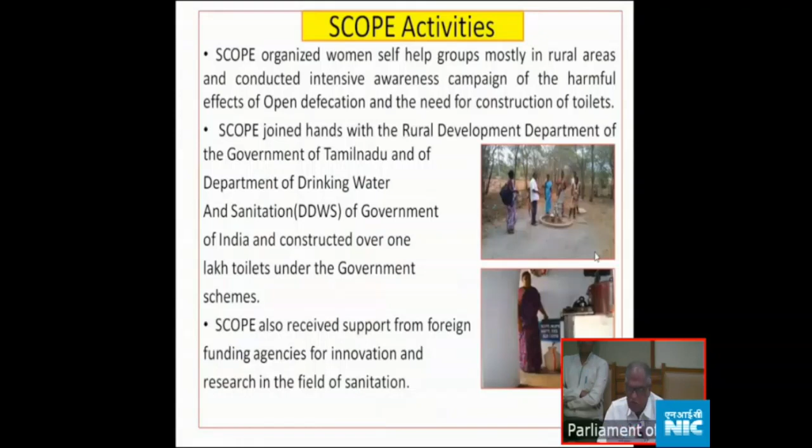Twin leach pit and septic tank toilet. And then many awareness programs I have conducted. Only then have I convinced the people to construct toilets and promote their usage.

I have also conducted training and created models to show in exhibitions. Different types of banners and pamphlets I have given to all the households and the people being trained.

These are all photographs of different awareness programs. I have shown what is happening in the field, because seeing is believing. Otherwise it is very difficult to convince the people.

Mainly we are constructing twin leach pit toilets, and people themselves construct septic tank toilets. Since the conventional leach pit and septic tank toilets and underground sewage system necessitate a huge quantity of precious water, they need more water because for one use we need at least 8 to 10 liters of water for flushing.

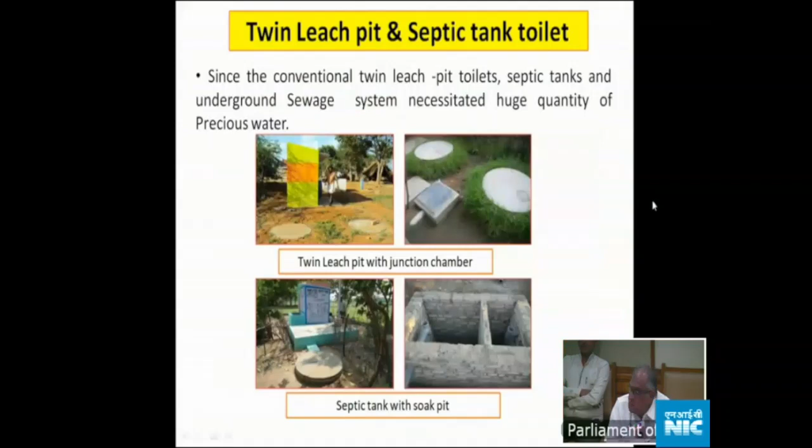What are the sanitation challenges? Even though the leach pit is a very good model, maintenance-free and everything, it functions well only under ideal conditions. We have to construct it strictly as per the norms, and we have to follow those norms.

In the first photograph, a hand pump is there and nearby a leach pit is there. If a leach pit is nearby, contamination will occur in the drinking water. In the next photo, the water level is like this - how can the leach pit work then? So in all places it is not good.

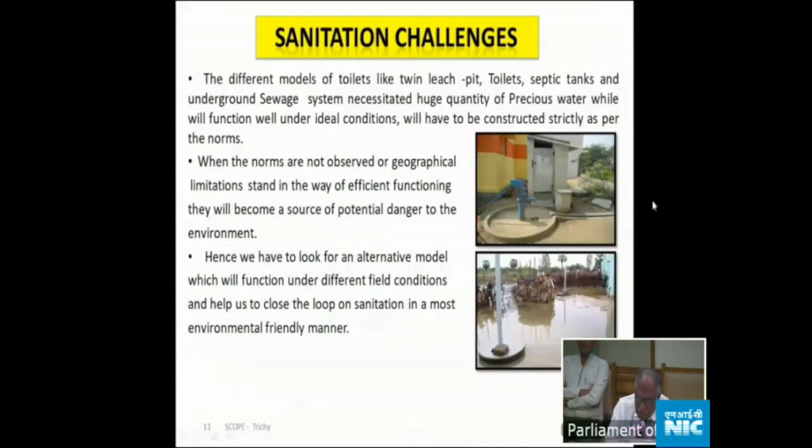Hence we have to look for an alternative model which will function under different field conditions and help us close the loop on sanitation in the most environmentally friendly manner. The answer for this is the ecological sanitation model, which is a solution to most of the problems we face in the field of sanitation.

What is EcoSan? Ecological sanitation is a very good model. Sanitation needs an integrated, sustainable ecosystem approach. It involves several cycles to ensure public health - pathogen, water, nutrient and energy cycles. Human excreta and wastewater are not waste; they are resources which could be reused for improving agricultural production and preventing contamination of the environment. The EcoSan approach aims at sanitizing the products and not transferring problems from one cycle to another.

It is closing the loop. People use their urine and feces, which become manure, natural manure, then it is used in the soil, then crops grow, then food, then we can eat.

The closing the loop is there. Next, this is the toilet model. This is constructed above the ground level.

There are two chambers. The yellow pipe is for urine and the blue pipe is a body wastewater pipe. Above that is only the toilet, so contamination will not be there. It is not necessary to use more water or flush the toilet.

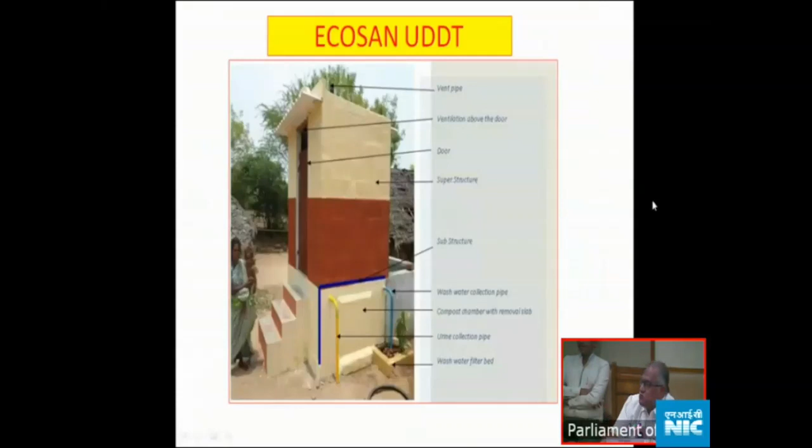See the two chambers, this is the inner view of the toilet pan. Center is the fecal matter hole, the front is urine, and back is wastewater from body washing. Everything is separated, and when one chamber fills up, they can use the other chamber.

We have designed it for one year. After 10 months, we can take it out by hand. It is not necessary to have any special people or any vehicle. This can be used for agriculture purposes.

Even Santha Sheela Nair, IAS, who was a secretary here in Delhi and Tamil Nadu, is taking that fecal matter compost in her hands.

No smell and no flies. Many households I have taken - more than 3,500 households I have opened and used for agriculture purposes.

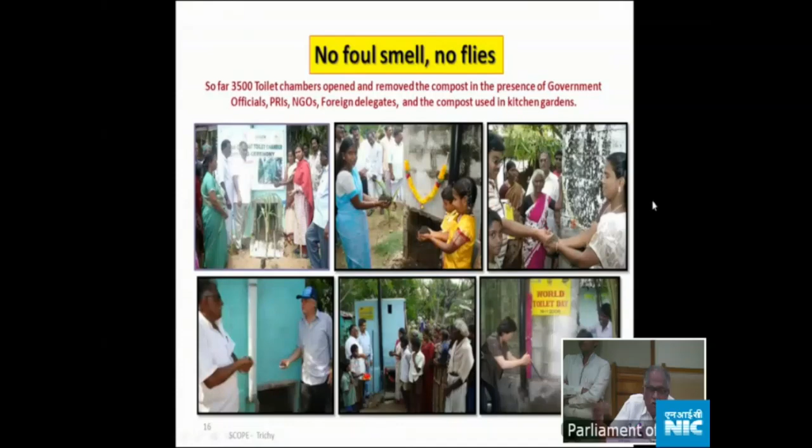Then the first community toilet. After constructing 250 individual toilets, with this experience I have constructed the first EcoSan community toilet in the country, in Musiri. That is a two toilet complex - one for men and another for women, and another one for elderly and handicapped persons.

See, the toilet was constructed in 2005. There are 7 toilets for men and 7 toilets for women, 14 chambers. One toilet has 2 chambers, so there are 14 chambers in each block.

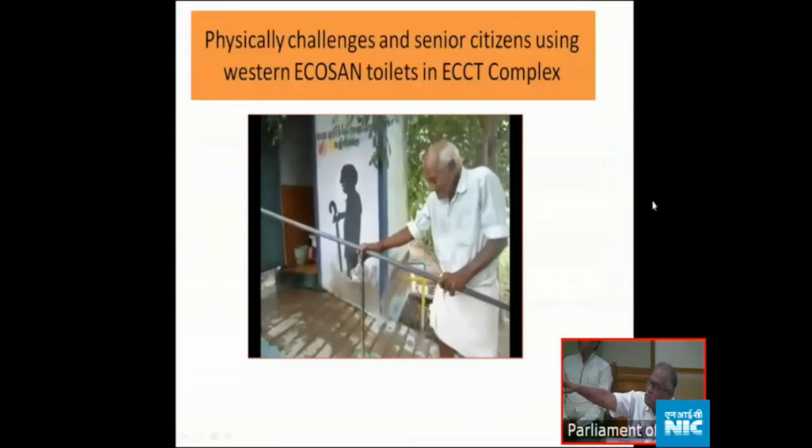Next slide - physically challenged and senior citizens using the Western EcoSan pan. I went to Philippines, they gave me a pan, a Western pan. I have put it in the community toilet. It is very easy for them to use the toilet.

For elderly people it is very difficult to sit and defecate. That's why in the Philippines they have already made the Western Eco Pan.

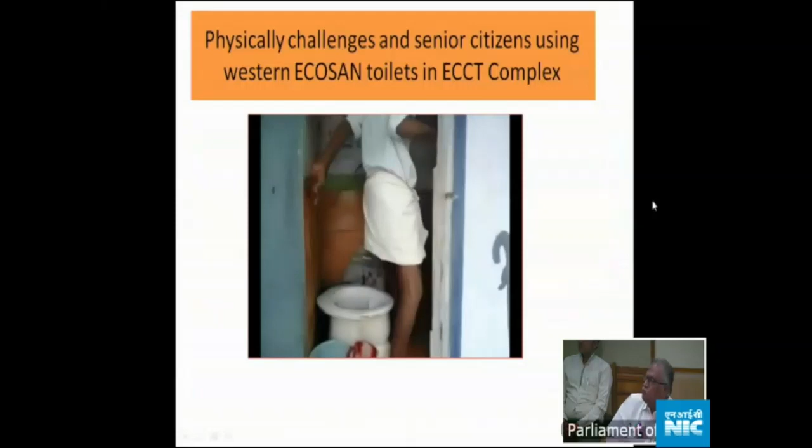Nothing is wasted. Urine is also used for agriculture, and fecal matter compost is also used for agriculture.

Those who are using the toilet can get money from it, because human waste is a valuable resource. In other community toilets, we go there and pay 2 rupees, 3 rupees, 5 rupees and get a token to use the toilet. But here, they use the toilet and take a small note, a small token we have given for them. The children have that.

We have marked it so each use they can get 10 paisa. In one month, one person can get 6 rupees. Like that, I have given money to the users.

Only then is this type of toilet promoted, because it is very difficult to change the mindset of the people. That's why I have given the money. Then people accepted it, and many toilets we have constructed.

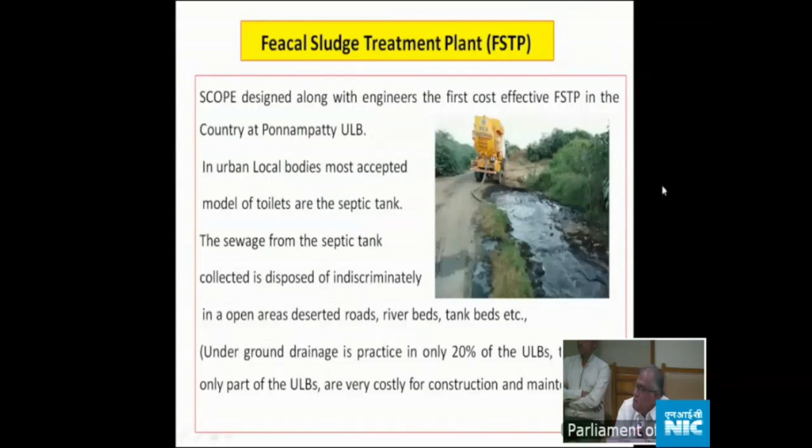The FSTP costs only 15 lakhs. I conducted this 4 years before in one town panchayat near Trichy, Ponnampatty. The treated water from the FSTP is used for raising vegetable gardens, trees, and even fish ponds, which enriches the water table area. Ponnampatty town panchayat was awarded the best town panchayat of Tamil Nadu in 2017 because of the fecal sludge treatment plant, composting, and drying of fecal sludge.

We have co-composting - we use natural composting for solid waste management, and we add the dried fecal sludge also. It is very useful for the farmers.

This is the plant, a small plant. There are 3 vertical filters, then 1 horizontal filter, then the urine collection tank. I have designed it to be very simple and cost effective, and very easy to use with no maintenance required. This is the plant.

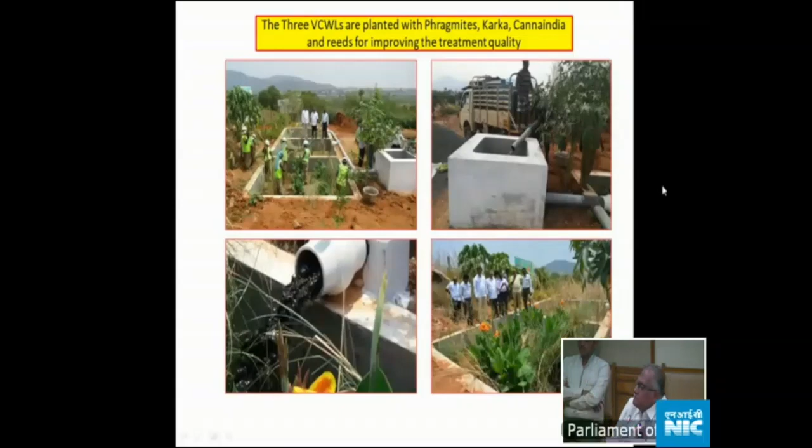See the co-composting, the dried composting like this. Inside, after 1 week or 10 days, everything dries like this because there is more sun heat. So we can take it in our hands and use it for composting, co-composting.

This is the composting, co-composting. I made different models also - 50%, 50%, 25%, 75% ratios like that. The agriculture university also conducted research on this. Now research is going on.

We have research in the environment department. I gave them the compost and the water, and they conducted research on that. Slowly they are conducting research at the agriculture university in Coimbatore.

Then there's the urine diversion flush toilet connected with the biogas plant. See, there is no waste - human waste is not at all a waste. That's why I made this connected toilet linked with the biogas plant.

That is the Dinabandhu model biogas plant. In one workshop in Delhi, I gave a PowerPoint presentation on this. They asked one question: if urine is not allowed into the biogas digester, would the gas output be more, would efficiency be more? Have you tried it?

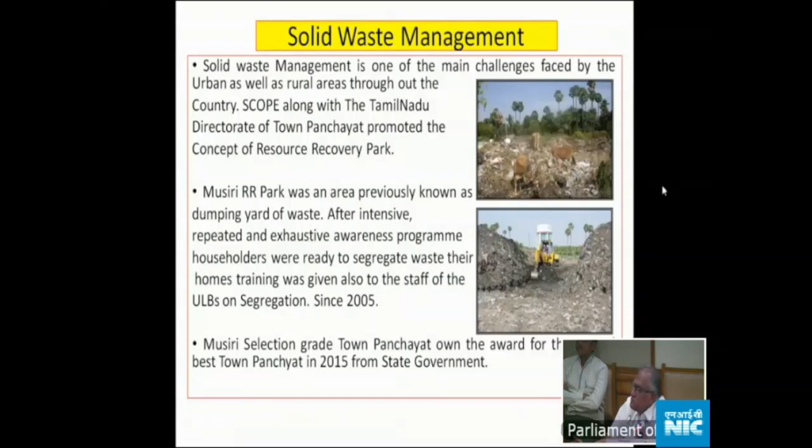See the pushcart and tricycle I have given to the 18 wards - 18 pushcarts and also 18 tricycles I have given to the town panchayat.

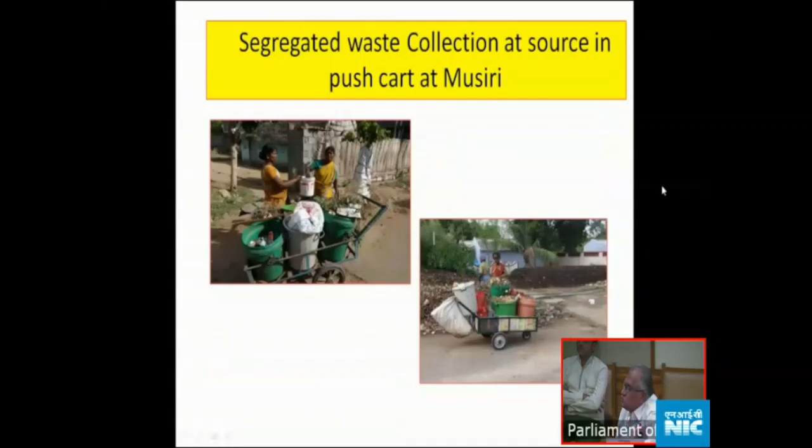They have collected the compost, segregated waste collection at source in pushcart at Musiri.

Then, after composting, it is a windrows method - I have made a windrows method. And also nearby the compost yard, one more toilet I have constructed, that is called a decentralized wastewater treatment plant, DEWATS. We have generated biogas and also the water is cleared, and that water is used for moisturizing the compost, so very good nutrition value compared to other compost.

And also I designed in 2005 a sieve. If you put the compost there, the sieve helps separate first quality and second quality. So it is very useful for farmers, they like it and they buy the compost for using in agriculture.

You can see farmers came and purchased this, the first quality and second quality compost.

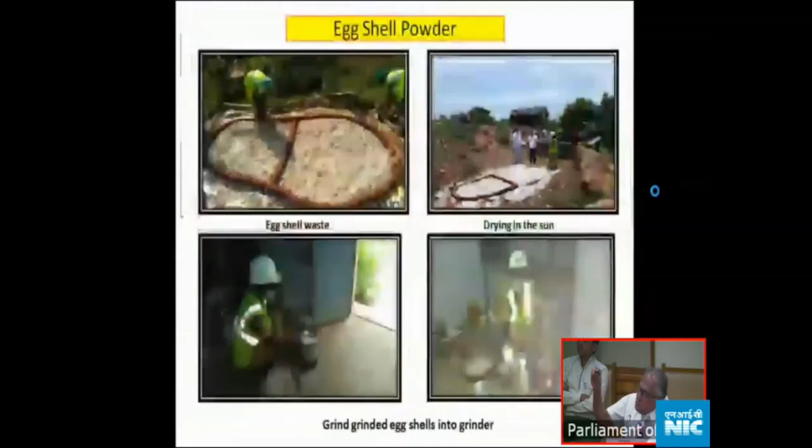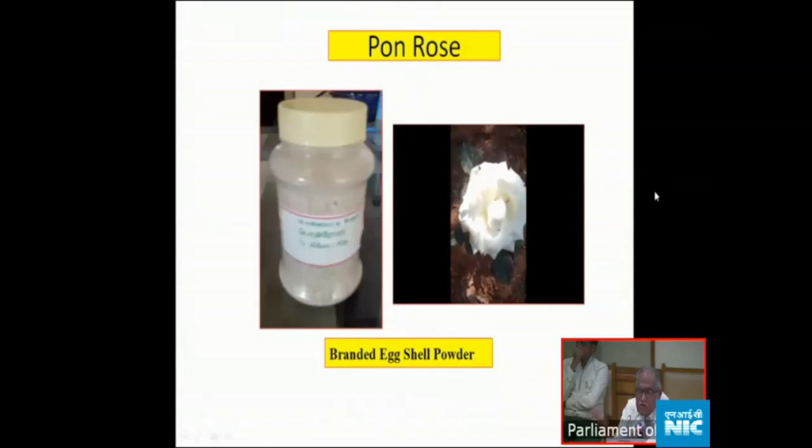Then vermi-wash - we put earthworms in a pot, pour water, and some compost is there. Then drops will come, the water drops will come, and that is very good manure. That is liquid fertilizer, a good liquid fertilizer.

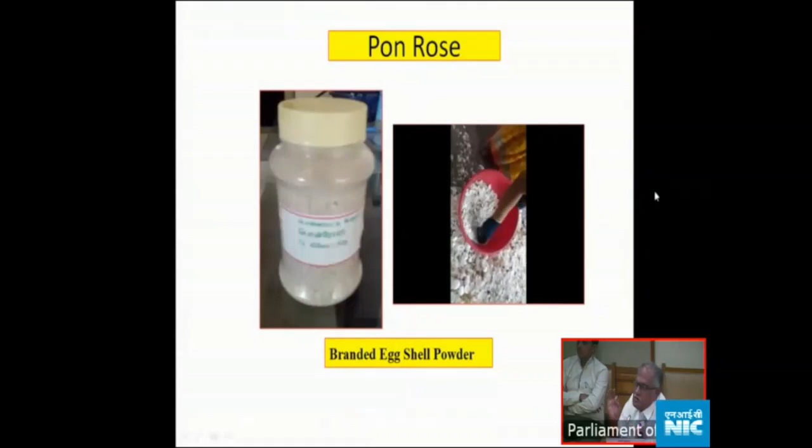Then we have to separate the egg shells, and we made the egg shell powder and gave it a branded name. This is 'Pon Rose' - in Ponnampatty town panchayat, pond is called rose like that, so we made it the branded name. And 'Kal Rose' is in Kallakudi. Like that we made branded names, and people are liking this and purchasing this powder because the rose plant gets very good nutrient value from the egg shells. That is how to make the egg shell powder.

Wait, front one, yeah, you click that. Yeah.

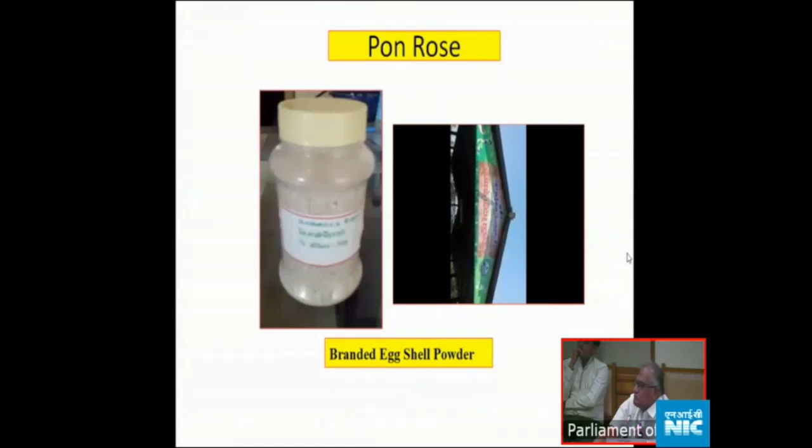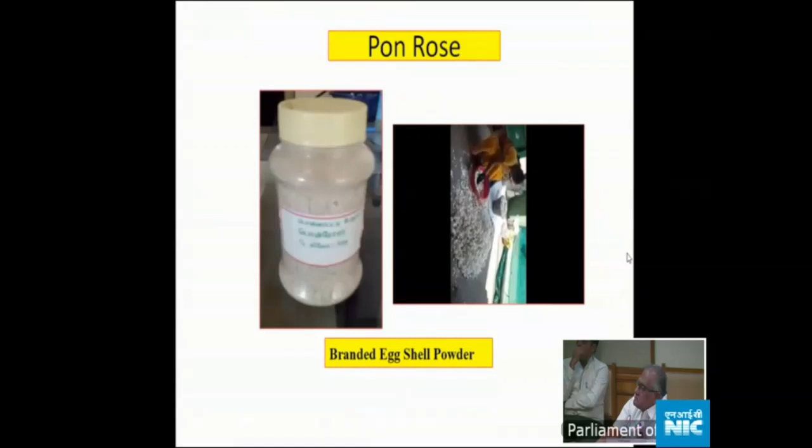Thoroughly washing the egg shells and drying it, after that we can make a powder form with the crusher.

Then lemon and orange waste is also dried and made into powder form, using it for vessel cleaning - very useful, natural vessel cleaning without chemicals. What is the concept of this? This is not waste, anything is not a waste, it is wealth. So we made whatever is useful out of it like that.

Then segregated plastic waste is collected, crushed and used for road making. In 2018, Dr. Vasudevan from Thiagarajar College, Madurai, was awarded Padma Shri because of this plastic waste innovation.

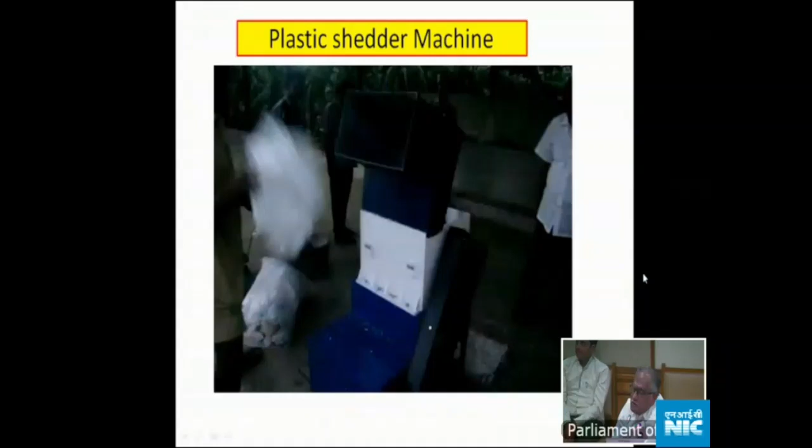Because of the crushed plastic, we can use it for road making. In Tamil Nadu, more places had roads made in 2017-18, and after that it is still doing very well. And also the cement industry is taking this plastic as well.

This is crushed plastic converted to road making material. It is very easy to make it like this.

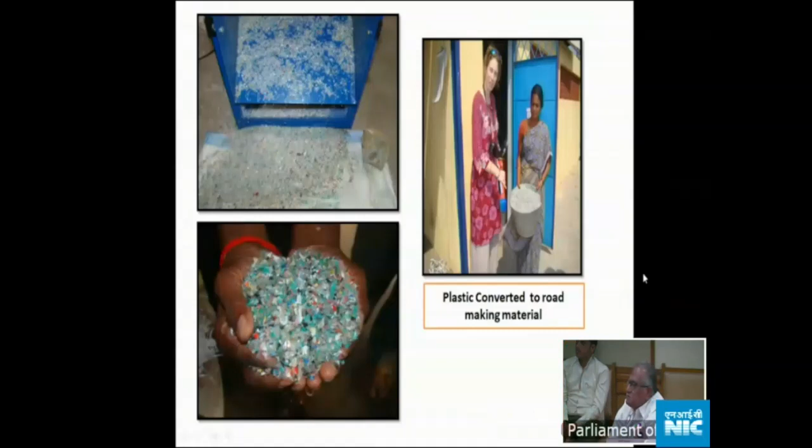Only 5 days training is enough for an ordinary person. Now, during the Corona period last year, blind people also are making it now. That takes more days, 10 days training for blind people instead of 5. So they are also earning now.

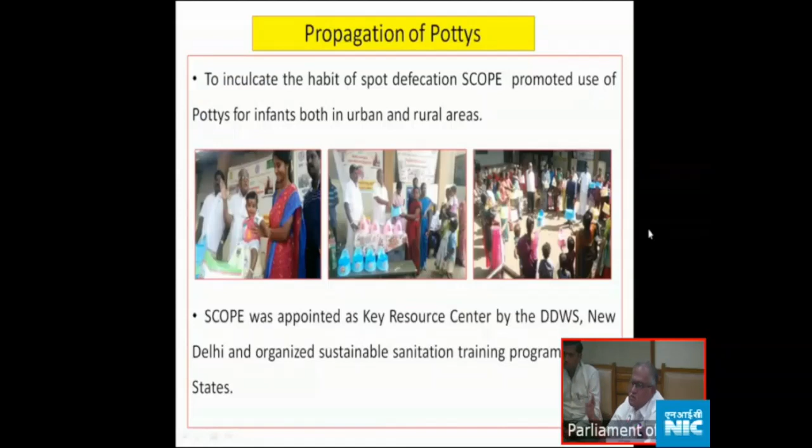So we made small toy pottys costing only 100 rupees, and gave them to all households for the children. If they use them for pottys, then after 3, 4, 5 years, they end up using only the toilet. So child to child, child to parent, and parent to community is a good approach for improving sanitation. That's why I have given more than 1 lakh pottys to children, and they are using it now. It is popularizing now.

I have constructed many school toilets, and even restrooms. All the toilets we call restrooms. But mainly for menstrual hygiene management, girls need a restroom to rest for at least 10 to 15 minutes and change the napkin, so we need a small room for that. I made that too, with a fan, ventilation, and a mirror so they can see their face. So I made it a girl-friendly toilet in the school.

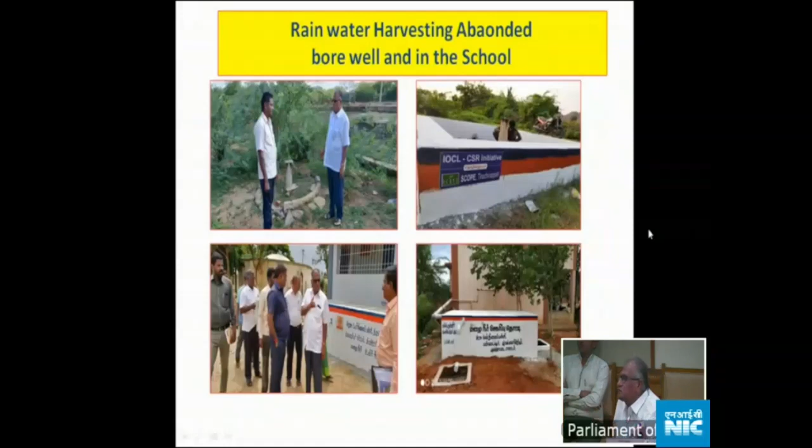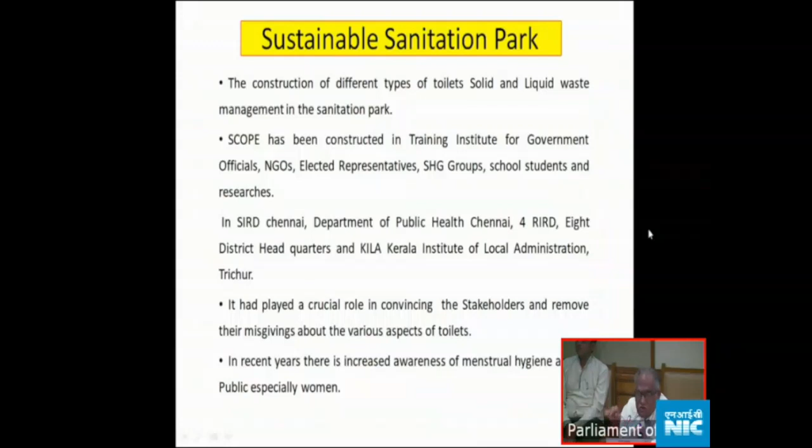Next, I designed a sustainable sanitation park in the SIRD State Resource Training Center in Chennai, and at RIRD and collector office - many places I have constructed this. In that sanitation park, about 25 models I have constructed - not only toilets, but Anganwadi toilets, school toilets, and solid waste and liquid waste management, all these things we have shown in the sanitation park.

Next, this is the sustainable sanitation park with different models, and there's a pledge on how to use the toilet, why we are using the toilet, and the importance of the toilet - all these things.

In many CSR activities, I have focused on sanitation only. Mainly, I supported Indian Oil Corporation in Andhra Pradesh and Karnataka. I have constructed more than 27 toilet complexes. In those toilet complexes, I have made girl-friendly toilets, mostly girl-friendly toilets.

And also more water facilities - borewells, and in the borewell I have put rainwater harvesting also, so that after 10 or 15 years there isn't no water. Like that I have made it. Many facilities are there - a bag hook outside, a shelf, then use the toilet and come back, and a hand washing facility, like that. Next.

Then the Miyawaki forest - I have planted more than 1 lakh trees in the watershed area. And also the Miyawaki method we made in 4 locations - Trichy, Pullambadi, Ponambalayam, and Kallakudi town panchayat and roadsides. All the Poramboke lands we made into Miyawaki forests. It is a very good model - more trees, and even in 1 year the height is like this, so it is very useful. We make barren land into a Miyawaki forest.

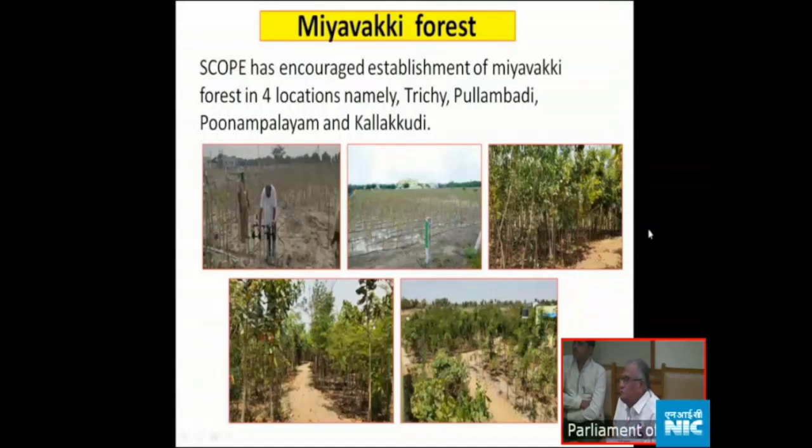Then COVID related activities. After COVID, mainly hand washing is needed - about 15 to 20 times we should be washing our hands. But kindly think of the water consumption for hand washing. We go there, open the tap, the water is running, then we take the soap and wash the hand properly, but the water is still running.

After that we wash the hands and all the soap is gone, then we use the same hand for closing the tap - but that is not a hygienic way. Or otherwise we can also wash the tap, but we need more water for that.

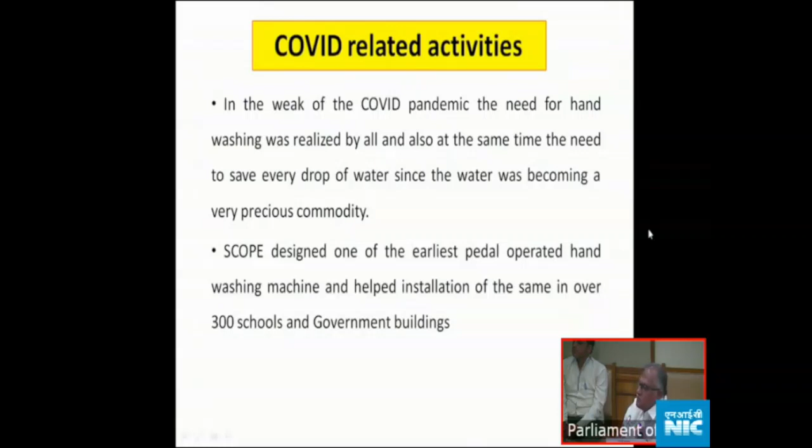That's why I went to Canada, to my grandchildren's school. There the pedal-operated hand washing system is there. I visited the toilet - they were not allowing visitors into the toilet, but I requested the principal to see it, and after that they gave me permission. There they have a pedal on the floor - you press it with your foot, and the water comes, so you're not necessarily touching anything, and also not wasting water.

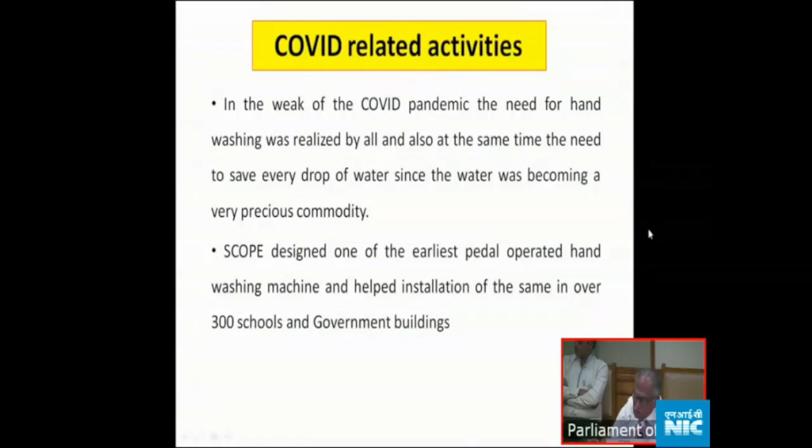So I have made it like that in the collector office. First I gave it to the collector, then the DRDA office, then all the BDO offices, then town panchayat office, then more than 300 schools I gave it to, because of COVID we need hand washing. That's why. Next please.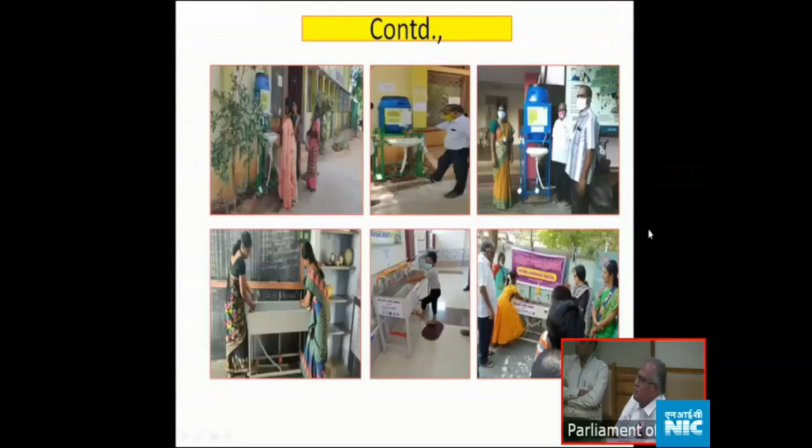These are all the hand washing facilities for the children. We made the distance also as needed, so only 3 taps for the children with proper distance between them. Like that we have made it. Good response, and the children liked it very much, and teachers also appreciated this hand washing system.

Then in Japan, the Lixil company made a small handwashing tool. Even if you put the bottle on that and put your hand like this, the water comes very slowly. Then you wash your hands, put your hand like this again, and it closes. Very simple, cost effective, and well made.

Because of the Padma Shri award, they sent 1,500 units for me. I have given them to the children, sanitary workers, and also the elders, and those who use it outside. They can go there and take this very simple, very small tool.

Next, the SATO toilet. They also have a new type of toilet pan. In that pan, you don't need 7 to 8 liters of water for flushing. Only 500 ml of water is enough for flushing. Like that they have designed it.

So I have constructed more than 200 toilets, and Japan people also came here to see the progress and the impact. What is the impact? All these things they studied. Because of COVID, we are not able to construct more toilets.

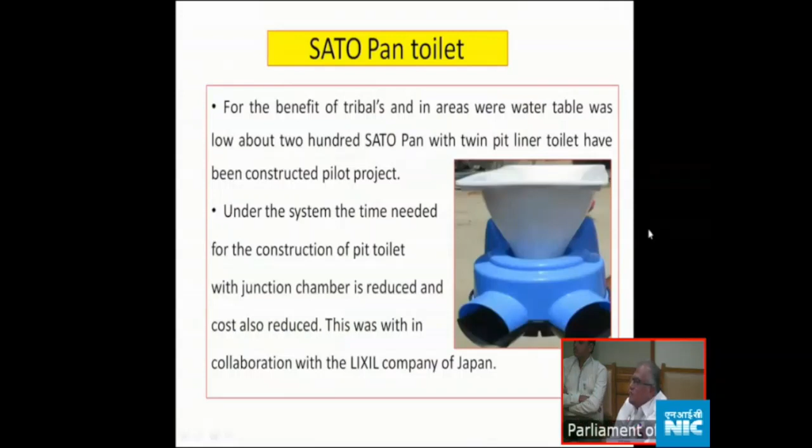These are all the SATO pan toilet. And also, one more thing, I have designed the liner of the pit. If it is a hilly area, we are not able to transport the ring, cement ring, or bricks, and they get damaged, more damaged. That's why this liner is there, very easy to transport, and putting the liner is also very easy. Construction is also easy, and there is no wastage.

That's why the liner was also introduced in the corona field. After that, I have planned more toilets with liner. This is a plastic one, but it's not thrown-away plastic. It's very simple and cost effective. When you compare it to the cement ring, it's cost effective also.

In conclusion, since 1986, SCOPE has been working continuously in the field of sanitation, solid waste, fecal sludge management, MHM, school sanitation, rainwater harvesting, etc. It continues work in these related fields during the COVID period and even now. All my projects were in alignment with government policies and supported by government and other agencies. I wish and appeal to all of you to carry on the message of sanitation and solid waste management to improve the economic, social, and quality of life of the people of India.